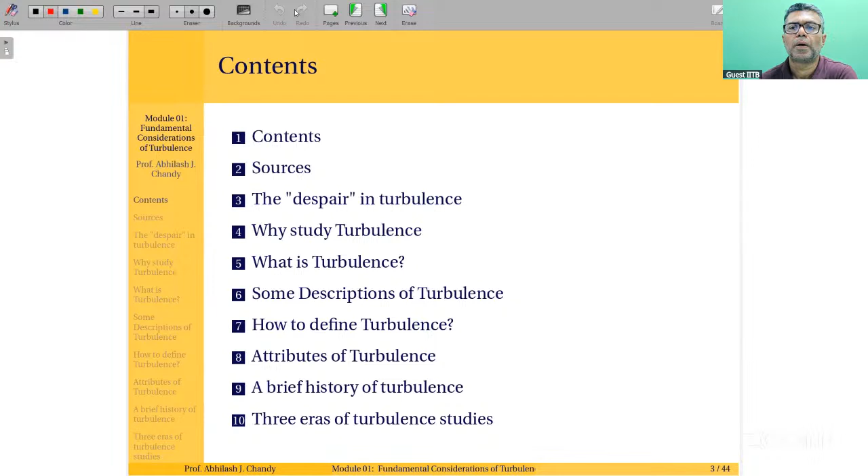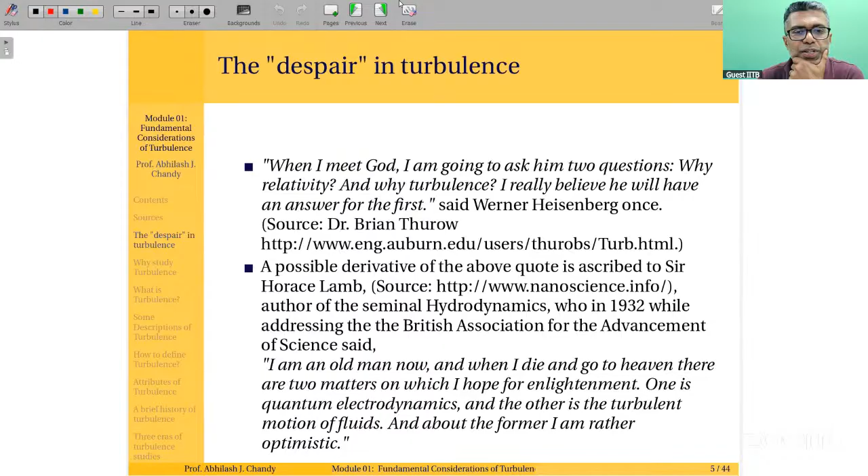So we started with the despair in turbulence, if you remember, where I shared some very interesting quotes by scientists all the way from the 1900s, talking about how difficult a topic turbulence is. It's very interesting how turbulence was, and is, considered to be one of the most challenging topics.

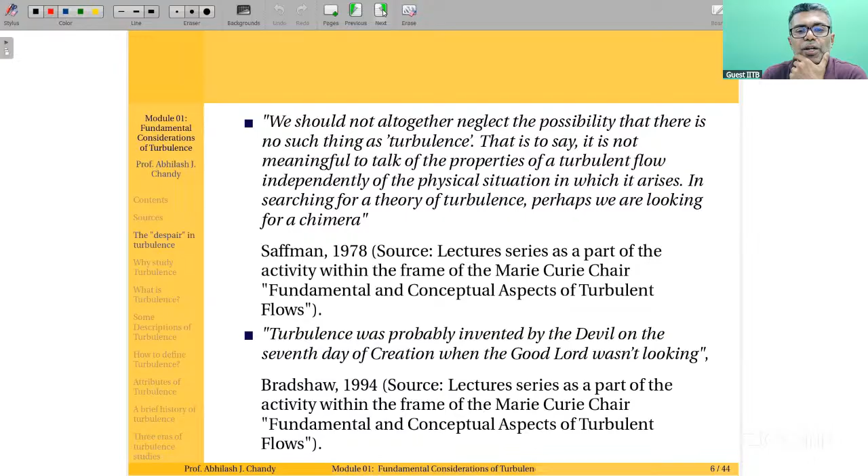Some very interesting quotes just give some historical context on how complicated a problem turbulence is, and it's challenging learning it. The reason I started with that is to give you an idea - when studying a topic, we have to know why we are learning it, but also know the depth of the problem, the several challenges to understanding this. It's not a simple problem - it's a very challenging problem. In all of classical physics, this is considered by many to be the most challenging problem.

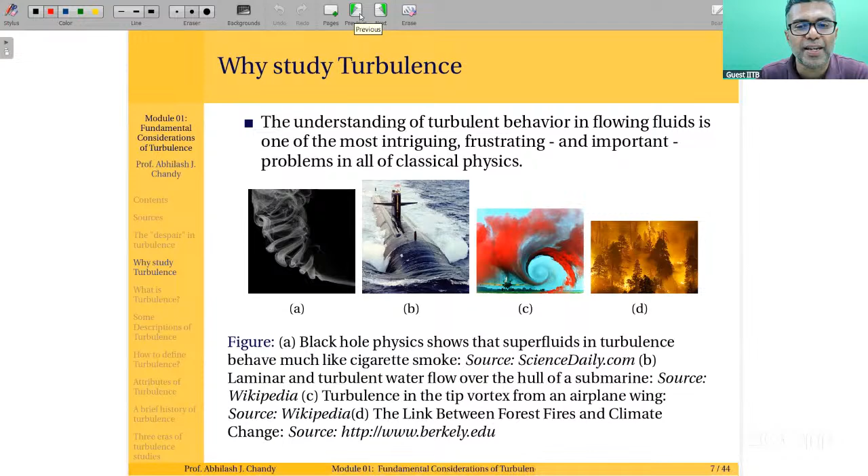And we looked at some very simple examples, talked about those in detail. There are some very illustrative pictures shown on this slide - if you remember, forest fires, wingtip vortices, the wake behind a submarine, cigarette smoke, and due to buoyancy how it rises up and twirls and creates all these very interesting structures. So it presents some very beautiful pictures, but it's a very complicated problem to understand.

The fact that turbulence is there in a lot of different applications around us makes it even more interesting, because in spite of it being all around us in a variety of applications, our understanding of it still has limitations, and that cannot be said about a lot of other problems.

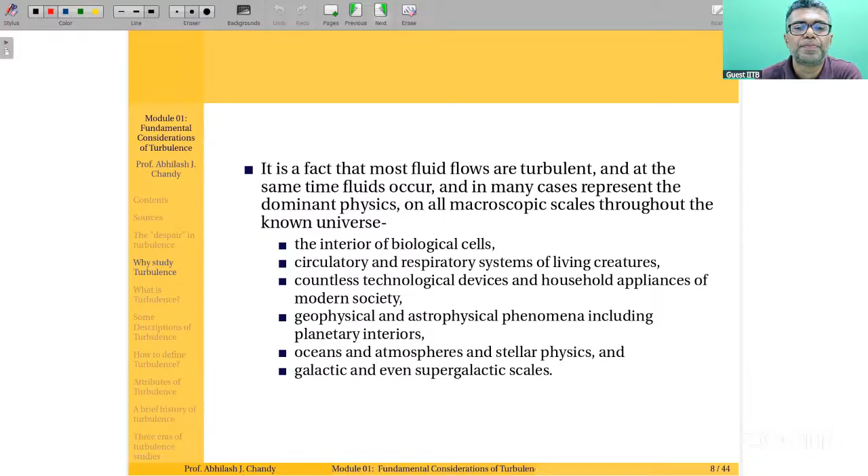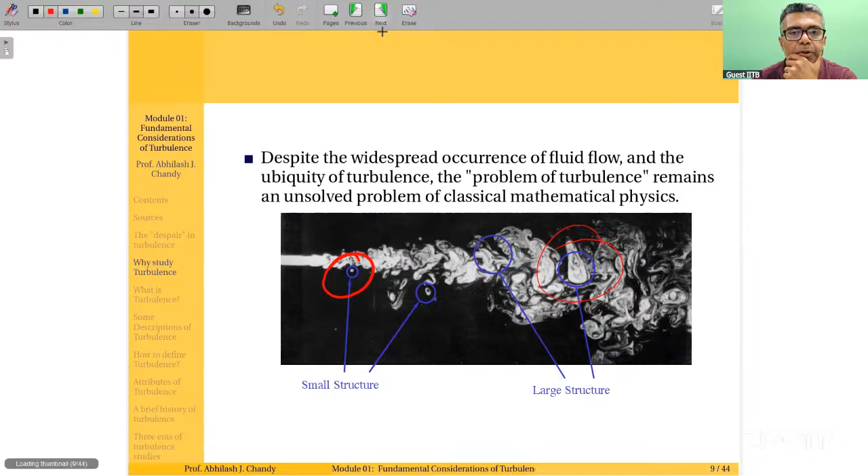That means your resolution has to be good enough to capture both, and that brings in one of the biggest challenges in turbulence. Obviously this problem has been studied quite a bit in the 19th and 20th centuries, but we still don't have a complete understanding.

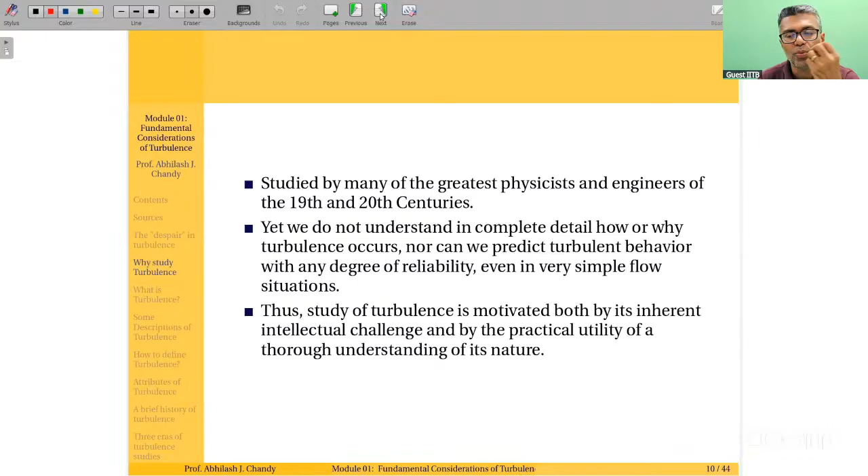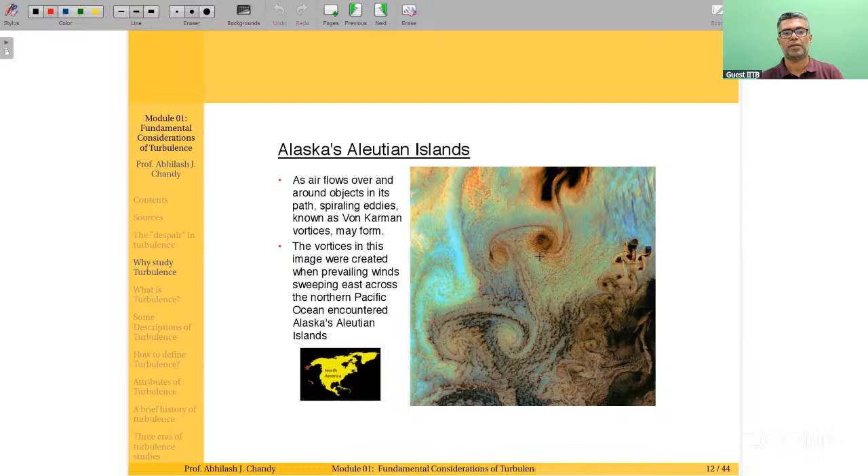This is another satellite image over another set of islands, and you will see hairpin vortices being formed as wind, air flowing over objects. These are called von Karman vortices, exactly what you see when you have flow over a cylinder. Very interesting things we see here. Here again, another example of swirling clouds, again von Karman vortices.

So we move on by asking ourselves, what is turbulence? I had this picture of an elephant and six blind men touching different parts of the elephant and making their own interpretation of what they are touching. One guy says it's a fan, another says it's a snake, another says it's a tree or a rope, and so on. So they make these interpretations about turbulence.

Basically what I'm trying to say is, especially over the last 100 years, more in the 1900s going towards the late 1900s, there were definitions and understandings of turbulence that actually evolved over time. As we'll see in this module, we now have a modern definition of turbulence which was not there initially. So everybody has had their own interpretation of turbulence, and that's what I'm trying to illustrate through this picture.

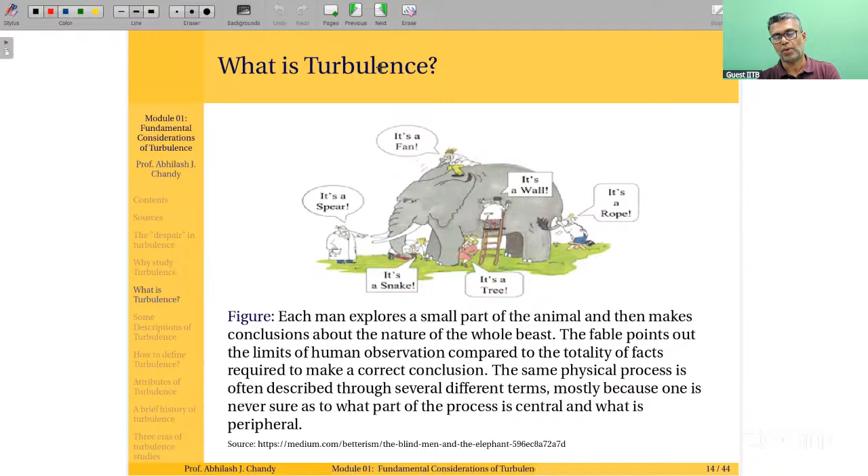So descriptions of turbulence is what we started with. We had this picture - Da Vinci's painting describing turbulence. And believe it or not, this was the first description of turbulence. He described it through this small paragraph, comparing it to that of long hair.

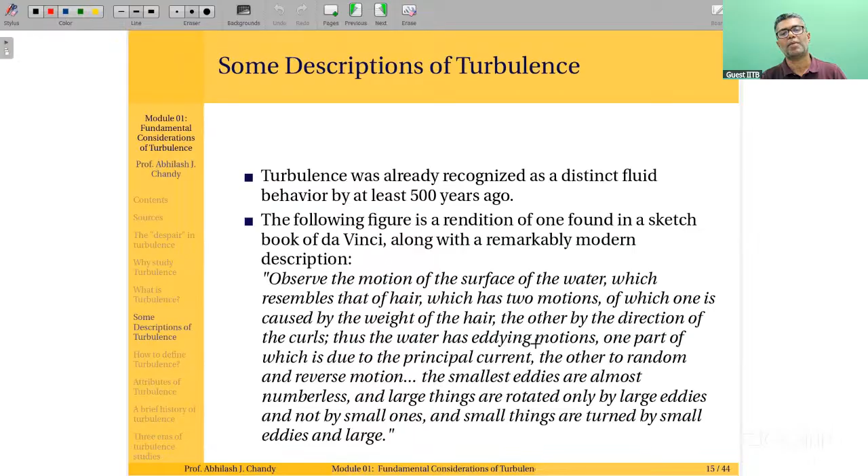Even then, this was obviously translated, but he described the flow of water through eddying motions. And it's so interesting, right? Even at that time, Da Vinci just put his observations down on paper, and that's what this is. He was describing what we now actually describe turbulence as - water has eddying motions, one part of it due to principal current and the other due to random and reverse motion. Essentially, what he is describing as large scale versus small scales. That's exactly what he's describing.

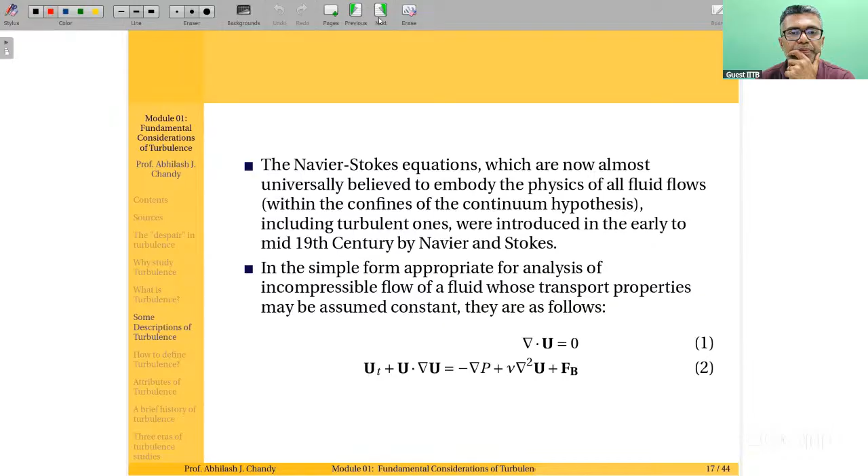So much later, if we go further down in the years, you will see that we started to describe fluid flow and consequently turbulence by Navier-Stokes equations - a set of equations shown here, continuity and the momentum equation. Now obviously, solving these equations is challenging. Analytically, they cannot be solved unless you make assumptions and simplify them significantly. So here, what we have is a set of non-linear equations that need some kind of numerical method in order to solve them. Exact solutions are available, but only for very simple problems.

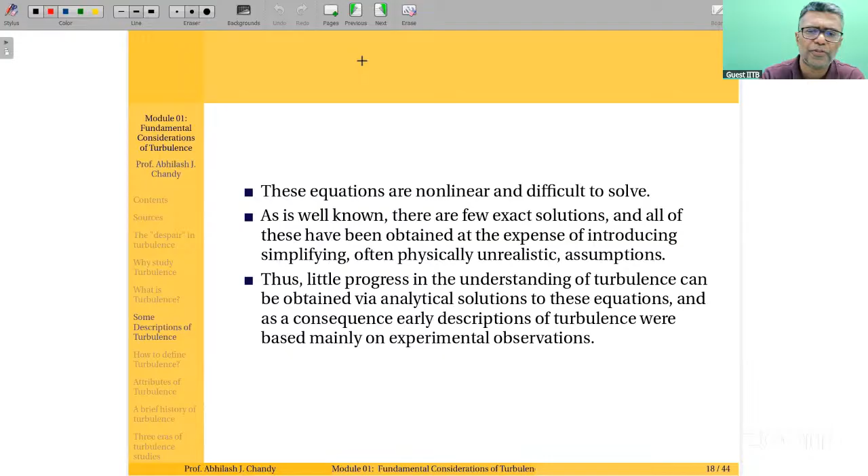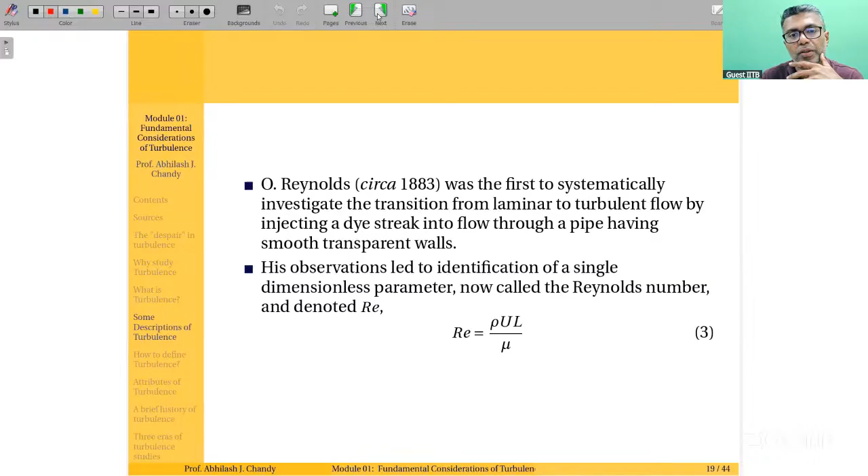So what he initially saw was at a certain flow rate, obviously the dye was smooth, its edges were very well defined. But then as you increase the flow rate, he started to see fluctuations in the dye movement - some chaos, some recirculation, some fluctuations. The edges started to be more blurred. And then as he increased the flow rate even further, there was a vigorous mixing of the dye with the background fluid, as in water. Vigorous mixing.

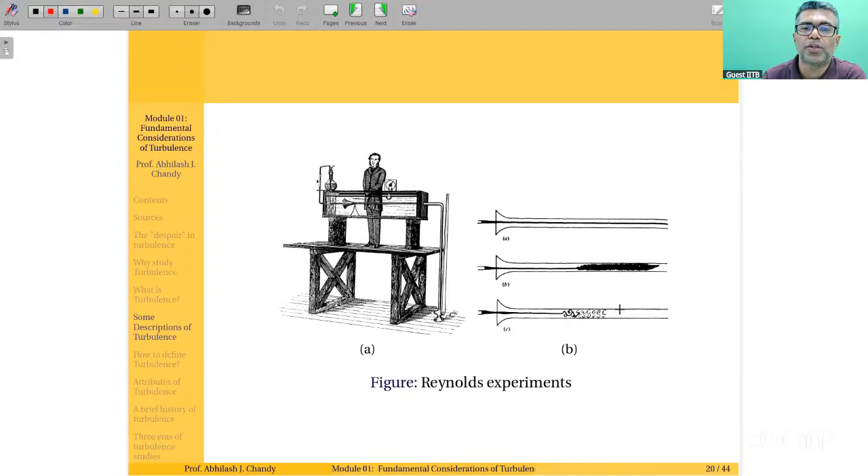So here you will see that the dye sort of mixes completely with the water, as you can see here. And that's because of the turbulence. That was his observation through this experiment. So that enhanced mixing is one of the key aspects of turbulence - enhanced mixing. And we spend a lot of time talking about this mixing.

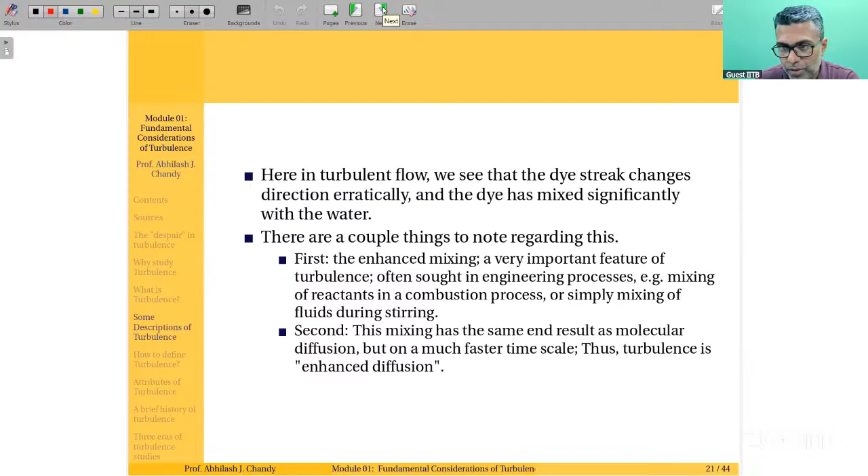And so it's like diffusion, right? Diffusion in the traditional sense is molecular diffusion. It happens due to a molecular property called diffusivity. Turbulence, we call it enhanced diffusion, but it's not really diffusion. Diffusion happens because of diffusivity - mathematically, it is a second derivative of the quantity. But turbulence is not that, though it has the same effect, the same outcome as diffusion, as in mixing. So sometimes we call turbulence enhanced diffusion, although mathematically it is not, and physics-wise also it is not, but it has the same outcome.

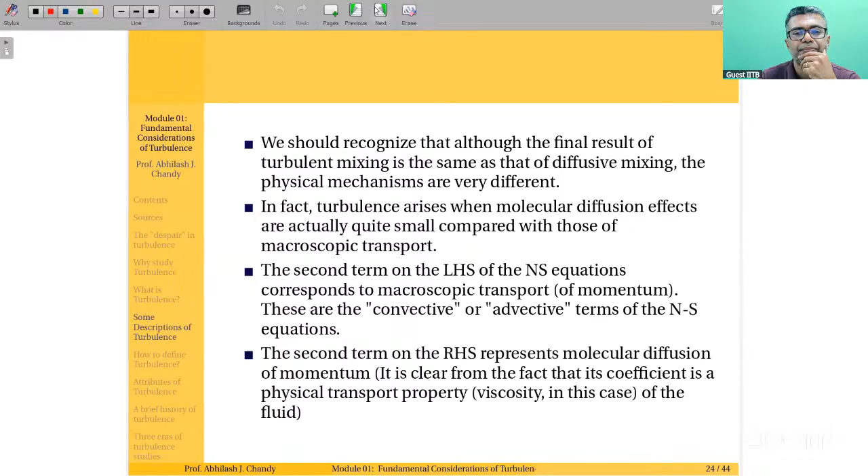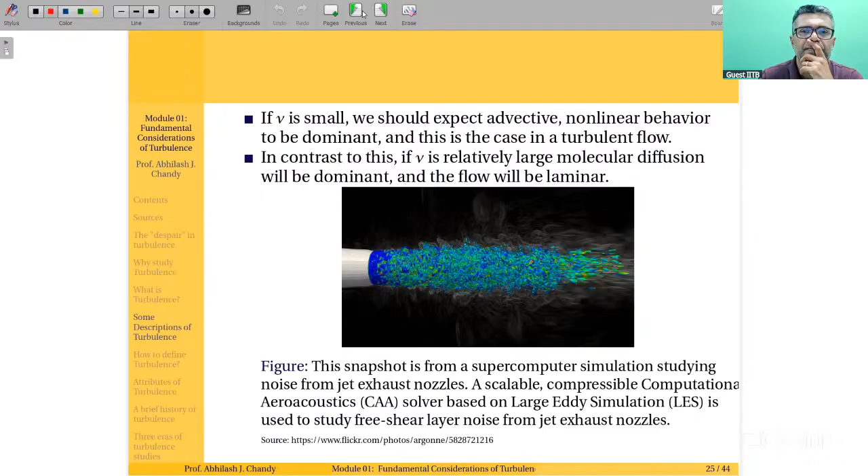So scientists, obviously if we want to study turbulence, it'll be a good idea to define it first - what is it, what is the definition for turbulence? It started from the 1920s when, instead of defining it, scientists actually wrote poems about it. So Richardson from 1922 wrote something like this, basically describing an aspect of turbulence. Essentially, he's describing the energy cascade - what we define as the energy cascade. The energy cascade is the transfer of energy from large scales to small scales, and that's what he was defining.

Von Karman had another definition for turbulence. Hinze had another definition for turbulence in 1959.

So all of this now, all these definitions, what happened was a lot of it described turbulence as a random phenomenon. And we had a lot of discussion on this, right? It's actually not random.

And we spent a lot of time on this trying to see why don't we call it random. Because we are saying that turbulence can be described by the Navier-Stokes equations. There's nothing random about the Navier-Stokes equations. It's deterministic. You solve those equations, albeit by a numerical method, you will get an answer. You solve it again, you will get the same answer, provided the boundary conditions are the same.

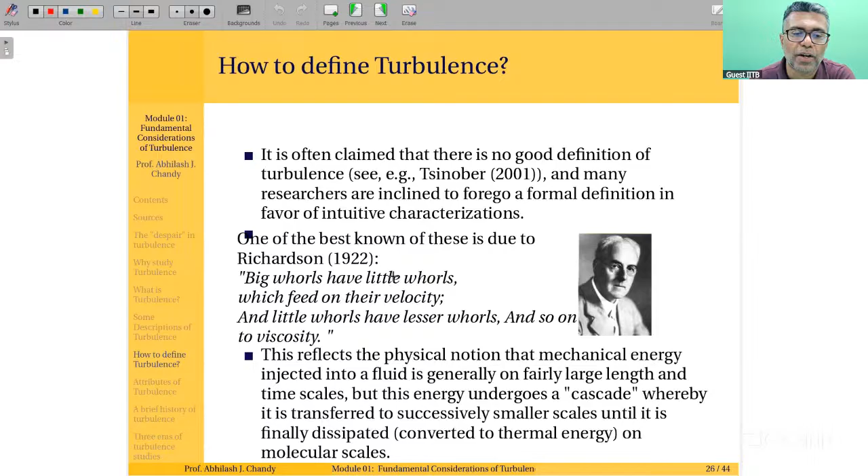So if you look here, Richardson, he didn't use the word random, but he said big whorls have little whorls which feed on their velocity. So he was describing the energy cascade here. But if you look at Von Karman, he said turbulence is an irregular motion which in general makes its appearance in fluids as they flow past solid surfaces or when neighboring streams of the same fluid flow past over one another.

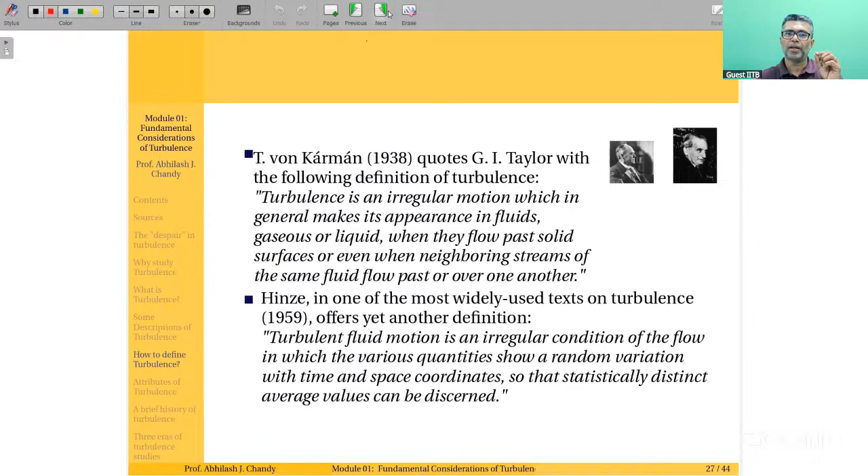Hinze later said it's an irregular condition, and then said various quantities show a random variation. So now we know that the random variation is not really correct. Even Pope talks about it — it's seemingly random, but it's not really random. And why do we say that? Because of this whole thing, you're trying to describe it using the Navier-Stokes equations, which is deterministic. Then how can you describe it as random?

So that's what we have in the slide, but none of the early definitions offer any precise characterization of turbulent flow — as in, predicting under which conditions will it or will it not occur. So then the question is, this lack of precision is possibly one of the reasons why we don't understand turbulence as well as we should. And if we don't know what it is, what can we say about the phenomena in a very quantitative sense?

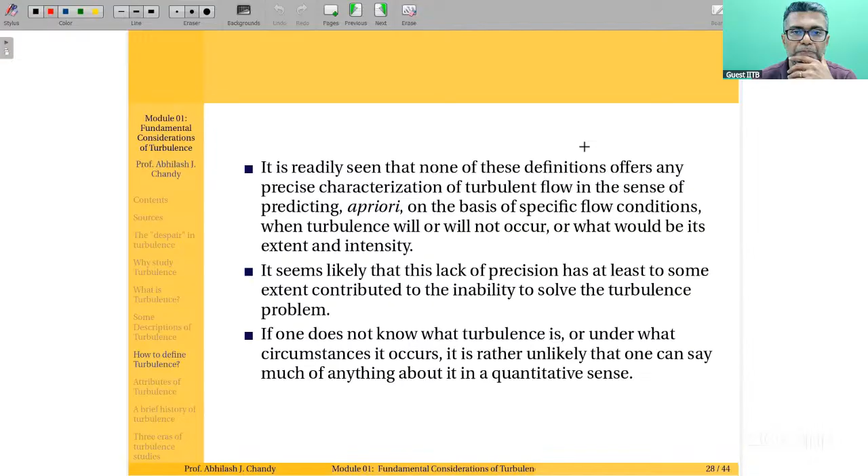So this is what we've been addressing in this module, right? And then we finally go on to define turbulence, and this is the modern definition of turbulence as it stands, and it has not evolved beyond this point. It's a chaotic solution to the 3D Navier-Stokes equations that is sensitive to initial data, and which occurs as a result of successive instabilities of laminar flows as a bifurcation parameter increases through a succession of values.

So a lot of information packed in here. Firstly, we say that it is a chaotic solution. We don't use the word random. We say that it is 3D. We say that it is represented by the Navier-Stokes equations. We say that it is sensitive to initial data. So any change in initial data is going to cause it to change the solution.

And that is what I was saying earlier, as in, if you solve the Navier-Stokes equations multiple times with the exact same set of conditions, you will get the exact same answer. On the other hand, even if you change the boundary conditions or the initial conditions slightly, then you will get a different answer. So it is highly sensitive to initial data.

And in addition, this definition talks about how it is a result of successive instabilities of laminar flows as a bifurcation parameter increases. What is that bifurcation parameter? The Reynolds number.

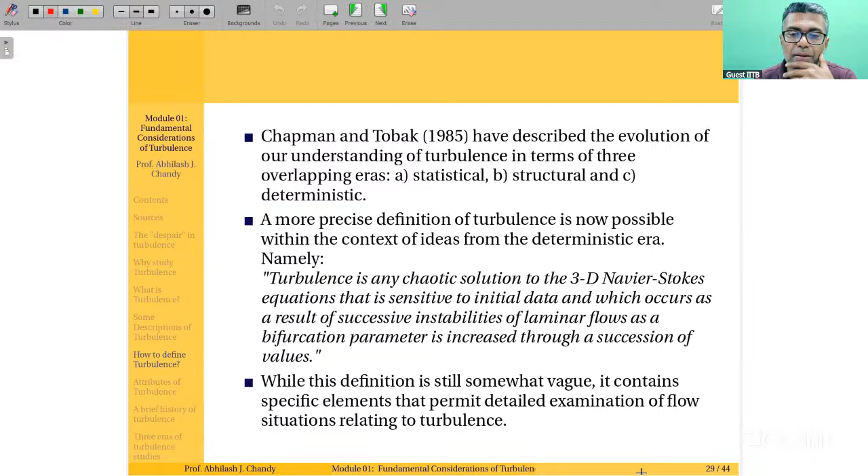So this definition leads us to describe the attributes of turbulence — the different attributes of turbulence. The fact that it is disorganized, chaotic, seemingly random. It is non-repeatable. Large range of length scales and time scales. Enhanced diffusion or mixing. Three-dimensionality. Intermittency. And that is what we discuss a lot in this module.

So this module offers that kind of description in the introduction, where we talk about how tough or difficult a problem turbulence is, how can we define turbulence, a lot of historical context, and what are the attributes of turbulence. That is what this module covers.